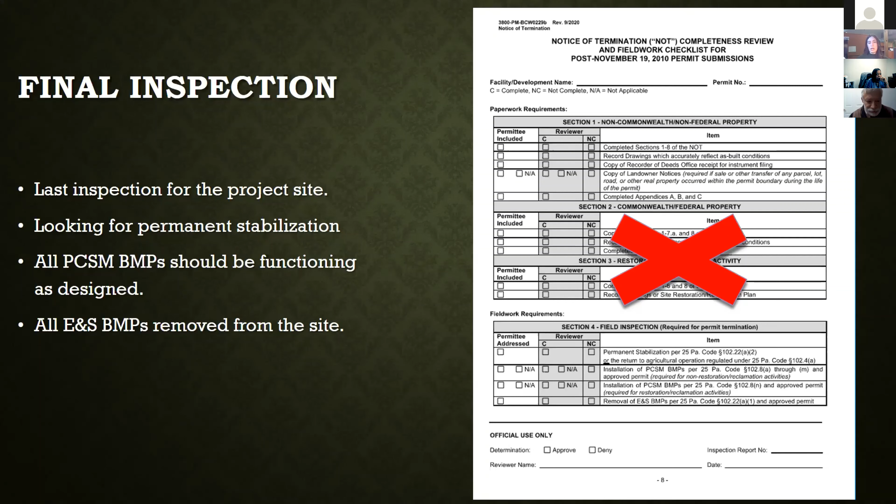So once the NPDES permit has been terminated and it is now the responsibility of the HOA, there are a few things to keep in mind to make sure the BMPs keep working as designed.

Each project comes with a post-construction stormwater management plan. Within those plans should be a detailed description of each BMP on site and the maintenance schedule for each. For example, there may be a vegetated swale that requires mowing twice a year, or a basin that will require inspection after heavy rainfall to ensure it is draining properly.

One other thing the operations and maintenance plan should detail is what the definition of failure is for each BMP. This will point out what signs to look for if the BMP were to stop functioning. In this case, the plan should also provide who to contact if this does occur.

An HOA or property maintenance group may want to keep a log of each BMP and document the routine inspections and maintenance procedures to be sure that it is done in a recommended time frame.

One thing to highlight is that once the permit is terminated, it is the HOA's responsibility to maintain all BMPs. If a member of the community would like to install any structures on their property, such as a shed or a pool, it's always best to consult the post-construction plan to be sure that the proposed structures are not within the limits of an existing PCSM BMP.

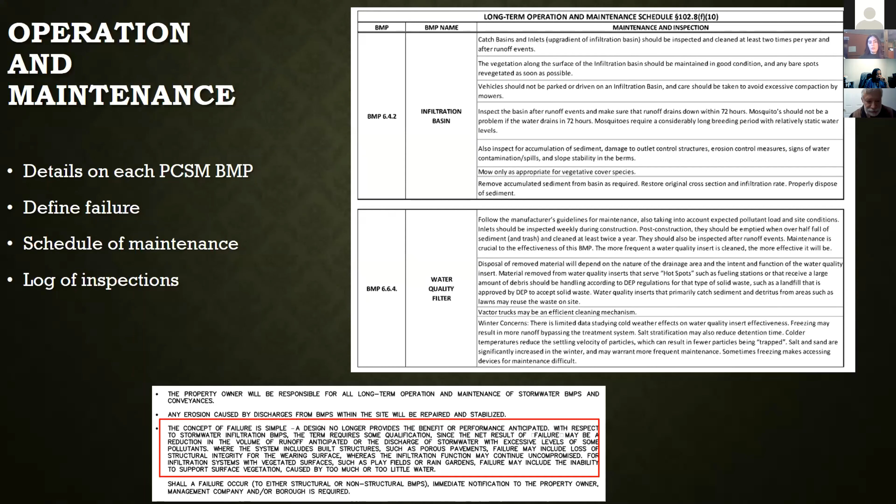Since the PCSM plan has been recorded, the BMPs are now deed restricted and cannot be removed unless otherwise mitigated on site. Okay, so once the project has been terminated from the NPDES permit and no longer held at the Conservation District...

It is usually sent to the local Department of Environmental Protection, or your local municipality should have a copy as well. In this case, for the Southeast Region, PA, the DEP is located in Norristown, Montgomery County. If it does occur that an HOA would need a set of plans after the permit is terminated, it would be best to contact DEP or reach out to your municipality.

So if the HOA has a stormwater complaint after the permit has been terminated, it should be directed to the local borough or township. In many cases, these types of complaints would be handled by the township's MS4 permit.

For example, here I showed my neighborhood in Phoenixville. They have on their website information about the MS4 permit, and they provide a link to contact the borough with questions. Conservation districts are only delegated to address stormwater complaints while the site is still covered under the NPDES permit.

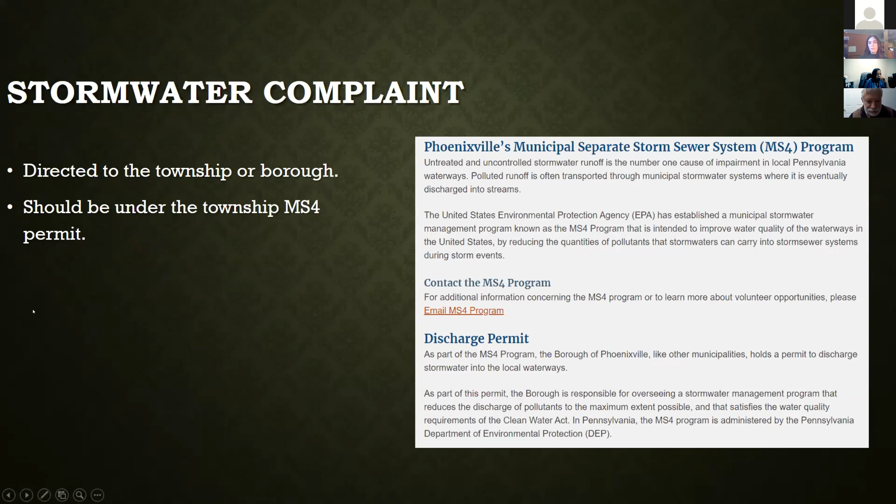Looking at the questions in the chat, it's looking like people are looking for clarification as to how this applies. So a general overview for our HOA members of what does NOT mean? What is the NPDES permit? It sounds as if we could take a step back and start at the beginning. That would be great. How does this apply to the HOAs? What is the general context?

Thank you. So the NOT is the notice of termination, which will be terminating the NPDES permit. And the NPDES permit is what is required in order to construct the property or whatever project is being built. So that would include any of the stormwater and E&S controls on site.

Yeah, I believe Ed just kind of cleared that up in the comments as well.

Thank you. And how does this apply to systems built prior to 2010? For instance, if the HOA was built in 1985?

I'm not too sure about that. I would have to get back to that question. Okay, thank you. Do any of our other speakers want to take a stab at that question? Jeff, are you unmuted?

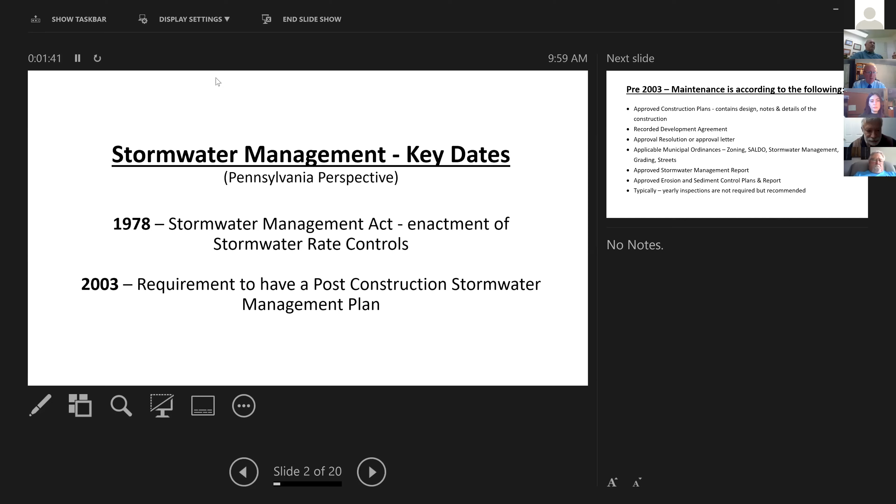The second key date was 2003, when we started having post-construction plans. I believe 2010 is when the NPDES requirement went from 5 acres to 1 acre—that's where 2010 comes in. As Carl noted, and as I'll touch on and Zach will touch on, the post-construction stormwater management plan and report have a large amount of information that help the association—both the board, the residents, and the manager—going forward on what they need to maintain and timing. We can address some of that with the questions.

Pre-2003, we talked about existing developments. They have swales, detention basins, storm sewers, all those improvements. What's really important to know is get a copy of the approved construction plans. Typically the municipality has these, some are scanned, some are paper and need to be scanned, but getting the construction plans, all the design, the notes and the details, that helps.

Because that's basically a blueprint of what was to be built. There's a recorded development agreement that will often have conditions in it for maintenance, and operations and maintenance agreements. There's an approval resolution or approval letter that may also have terms and conditions. Developments are also subject to the applicable municipal ordinances, such as zoning, subdivision land development, stormwater management, grading, streets. All of these things have elements of maintenance built in.

There is typically an approved stormwater management report. Sometimes there's notes and details in that report that don't reflect on the plans. There's an approved erosion sediment control plan and a report, or E&S as we talk about it. Typically yearly inspections are not required for most of these, but they're often recommended. Once a year at least gives you a good look. Is everything functioning? Is there clogging? Is there water? Typically you might see 6 to 8 inches of water in some of the BMPs, but if you're getting 2 or 3 feet, then it may not be functioning. There's ways to address improving it or changing vegetation.

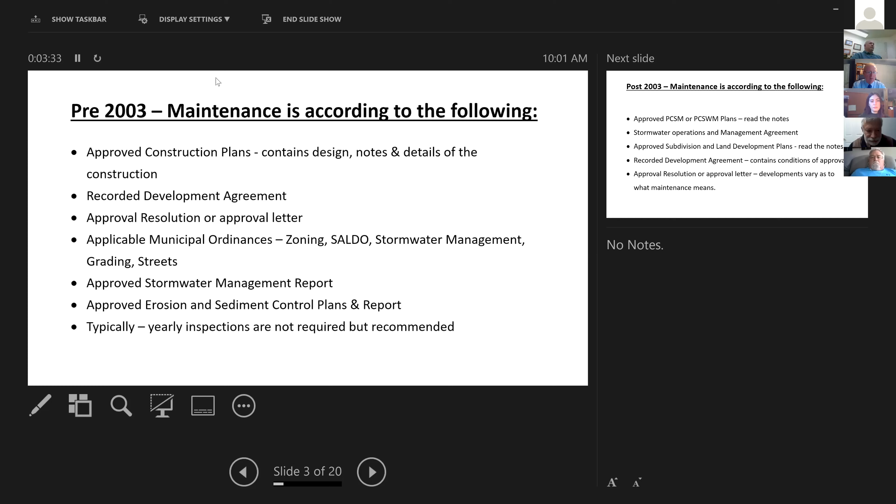Okay, post 2003, when we started having PCSM, post-construction stormwater management plans, or PCSWM, they're known both ways. Once these plans were part of the plan set, the requirements were that they get recorded at the courthouse in that particular county, which is a good thing.

Sometimes the scale and the clarity of those is difficult to read. You should, when you're transitioning, get a copy of all those items as part of the transition package. I would say this and I'll say it again: read the notes. Engineers love notes. We love notes to cover all kinds of things. And oftentimes you'll find a wealth of information buried within the notes.

There's a stormwater O&M agreement, operations and maintenance, and this will spell out all of the items that the HOA will have to do going forward after the NOT, notice of termination, is closed. There are approved plans, subdivision land development or construction improvement. Again, read the notes because they often clarify maintenance responsibilities - if the township takes the streets, is the HOA still responsible for the storm sewers underneath?

The development agreement, as we mentioned before, contains conditions of approval and the approval resolution or letter. Each of these developments are different. Different things are HOA responsibility, and sometimes things are a shared responsibility or township responsibility. So you really have to have your individual documents and your declaration.

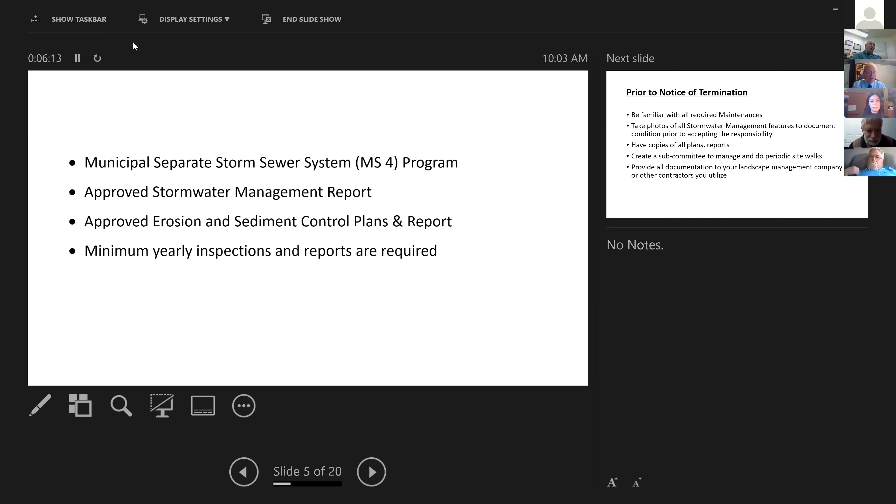And that report should contain a lot of information, including inspections. That's something that the township can do now. They can require the inspections now for everything, again, post-2003. Approved stormwater management report, erosion and sediment control, and again, yearly inspections and reports are required under MS4 and PCSM plans.

Prior to the notice of termination, as the development is getting built and close to being done, a lot of the developers like to keep control of all the BMPs, like to keep control of the open space, because all of these things are negatively impacted by the development. Development and dirt moving and construction generates a lot of dust, generates dirt, soil erosion. All these things serve to degrade the BMPs. BMPs don't like lots of silt, don't like all of the other roadway chemicals that get to them.

So what you want to do is be familiar with all the required maintenances that are called for under your post-construction plan. When you're getting close, take photos of everything, document the condition prior to the development, the HOA taking over responsibility.

I think this is an important point. All of these things are built, but they don't always function right away. Some of these vegetations take anywhere from a year to 3 years to really grow in. So when they plant a certain mix in a wet basin, it doesn't always show up right away. It takes time.

Have copies of all your plans and reports. This is information you should get through transition. The township should have a complete copy of everything, which you can obtain through a right to know request. And sometimes we go back right to the developer's engineer and get copies of stuff from them.

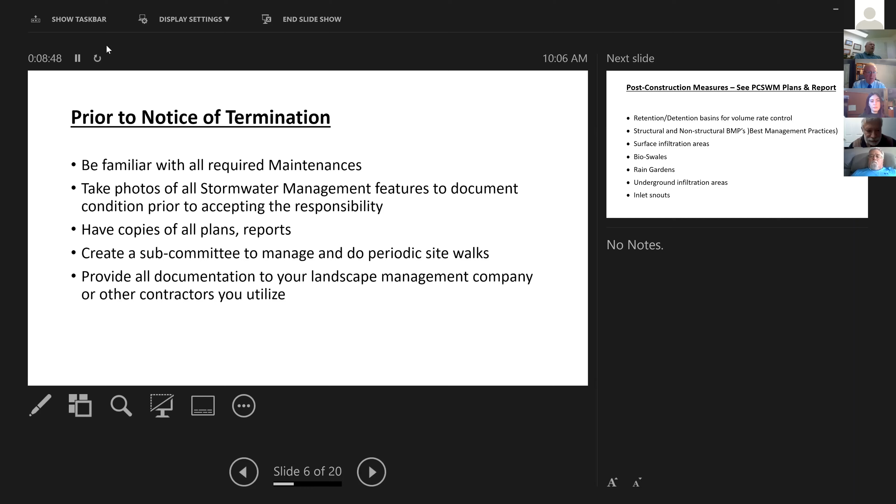Post-construction measures - look at the post-construction stormwater management plans and report. The retention-detention basins are essentially for volume rate control and some stormwater control. In many cases, they use the detention basin for sediment control, and what happens is the sediment will often slow down the rate of water being able to infiltrate in these areas.

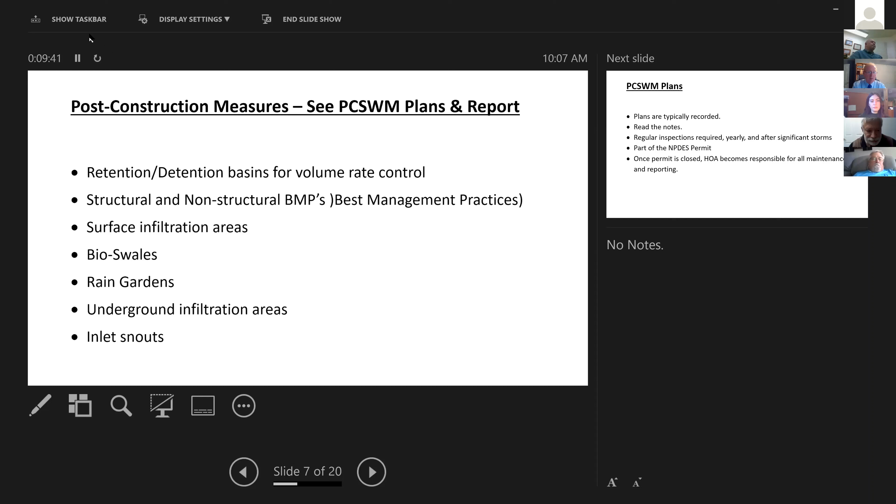There are surface infiltration areas, bioswales, rain gardens, underground infiltration areas, and inlet snouts. I have some pictures of these things so you can see what they are. Post-construction plans are typically recorded. Some municipalities didn't get into recording them right away, but I believe they are now.

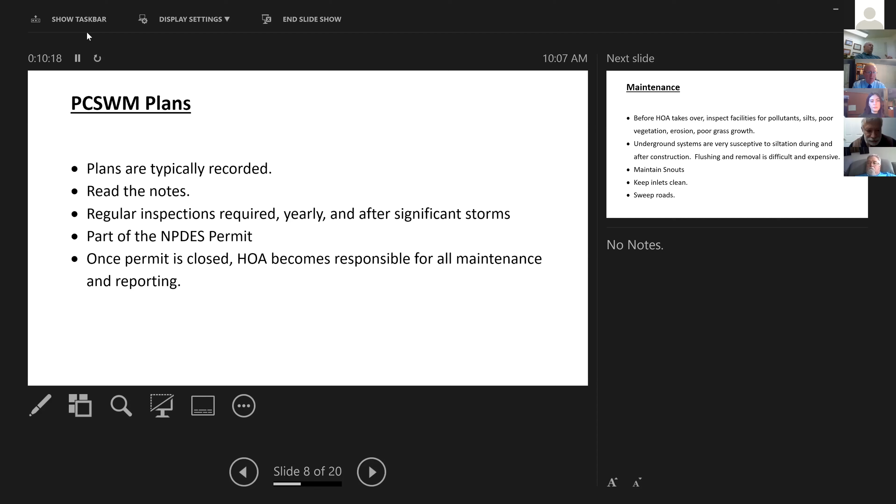Read the notes - they contain tons of information, all the maintenance guidelines, maintenance requirements, timing reports. This is all part of the NPDES permit, and we talked a little about the notice of termination. Once the permit's closed and the O&M agreement signed, the HOA takes on this responsibility, and I believe Carl touched on the fact that this can be assigned or turned over to other entities.

Maintenance - before you take it over, do a careful inspection. Look at silt, pollutants, vegetation, erosion, poor grass growth. Underground systems are very susceptible to siltation during and after construction. Flushing and removal is difficult and expensive - that truck that comes in to flush and take sediment out of underground basins will run you between $2,500 and $5,000 a day.

There are inlet snouts, which are fiberglass devices designed to keep plastic bottles, glass bottles, and other larger pollutants out of the stormwater system. Those will need to be periodically opened up and maintained. Keep your inlets clean - one of the biggest things I see when inspecting is inlets clogged on the surface, which means they're not functioning, especially with leaves, and material in the bottom sometimes clogging the water from getting into the pipe.

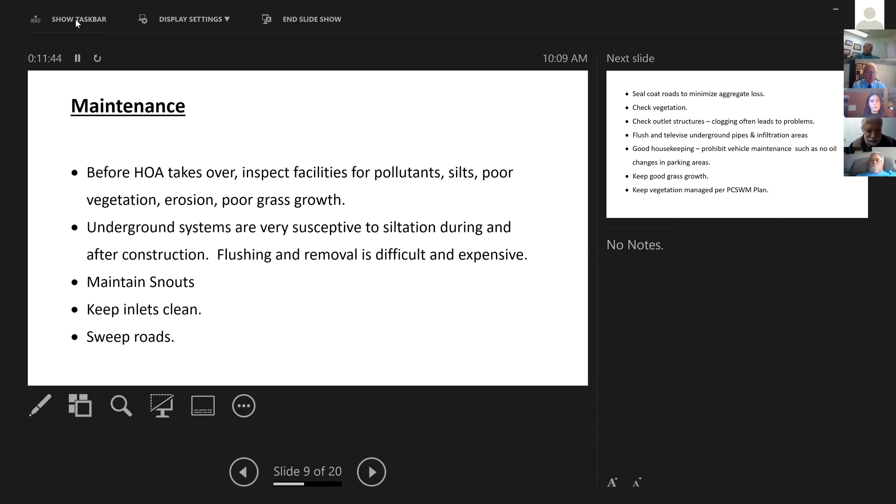Road sweeping, as Carl mentioned, is a BMP that can keep the amount of silt down. As asphalt roads weather from outside weather and sun, they dry out. As it dries out, that surface layer of stone gets looser and eventually gets washed in. Seal coat your roads periodically - it minimizes aggregate loss, which keeps your systems more clean.

Check your vegetation, good grass growth in the swales. Check your outlet structures - clogging is often one of the biggest issues. You may need to flush and televise all the underground pipes and infiltration areas. Again, when they're buried after they're done, it's very difficult to get that silt out.

Good housekeeping - most associations already have these rules, prohibiting vehicle maintenance, oil changes, things like that which really do damage to all these systems. Keep good grass growth - this is very important, as all that silt that occurs from erosion will get into your storm system and into your BMPs.

As the PCSM plan requires, keep your vegetation. I also want to point out that most PCSM plans incorporate management of all the street trees, buffers, and areas that are to be preserved. So vegetation management is very important.

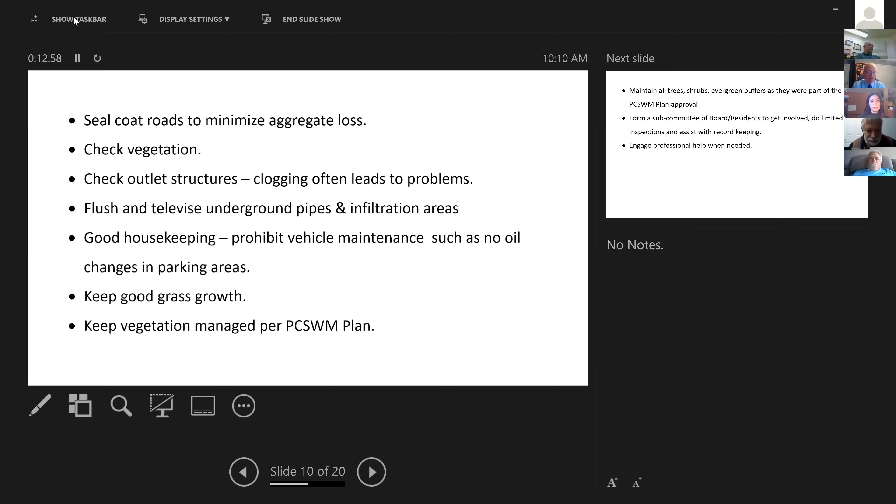Zach will touch on that a little bit.

Maintain all trees, shrubs, evergreens, as we mentioned. There are many of these inspections the board or residents can do themselves with a little bit of training, then engage professional help when needed. Typically, once a year you want somebody with proper training to come in. As noted in the questions, there are courses on stormwater management inspections and training, but a lot of this is simply having time and experience in the field, being involved with building developments like this.

Types of underground systems, just to touch on them so you can keep them in the back of your mind: pipes such as high density polyethylene, concrete, metal. Metal is very difficult, subject to premature failure and rusting, depending on if it has water in it all the time. If silt accumulates, it stays wet.

Plastic chambers or arch-type pipes, I'll show you one - what we call in the business a box of rocks, or ballast-filled pit. This is often on a lot to handle roof drains. Roof water is considered clean and can be infiltrated. Tanks and vaults are for heavier duty, and then there's pervious pavements.

I know some communities are built with pervious pavement. It needs to be vacuumed periodically, typically once or twice a year, and oftentimes the municipality will ask for a receipt from a company that does that type of work.

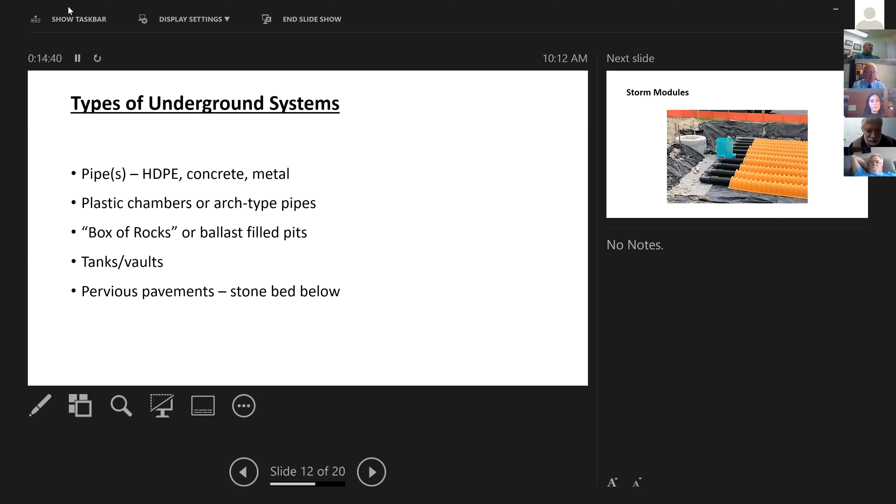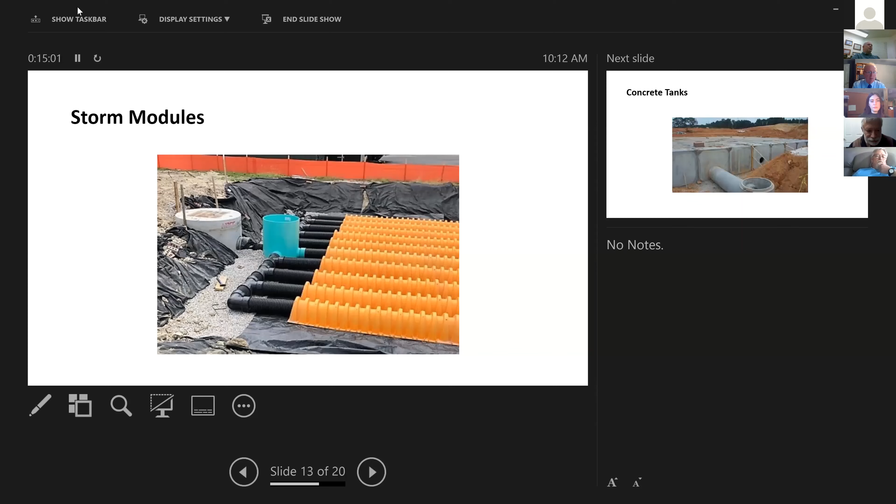Storm modules are like arch-type chambers to store stormwater underground. If you look carefully, there are very limited ways to inspect this, and if those pipes are in the range of 18 to 24 inches, getting in is a confined space issue. Sometimes you have to televise these, and you can't always get a good picture of all the silt that accumulates.

Concrete tanks - we did one of these a couple years ago in one of the municipalities I worked in, done for a bus garage where they needed the ability to park buses on top, quite a load. They're a little easier to access if the openings are big enough, but same thing, very difficult to flush.

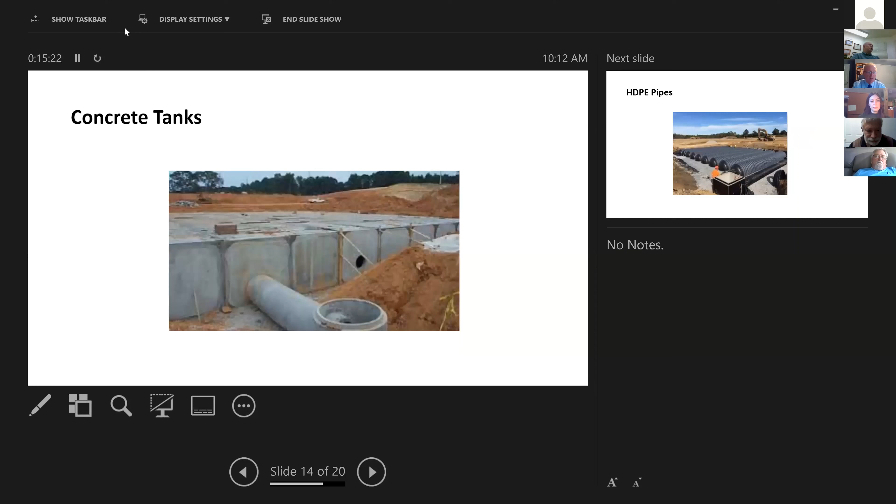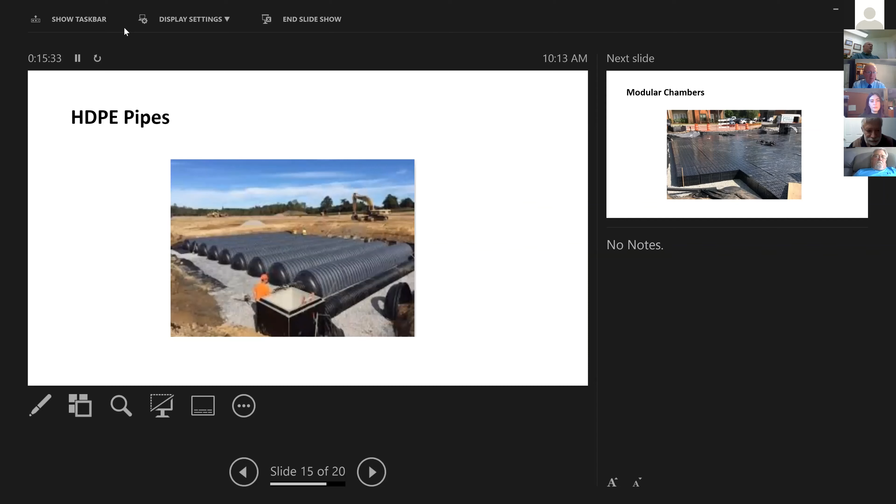HDPE pipes, sometimes there's a series of pipes like this with manifolds. If the pipes are big enough, somebody can get in, but again you have confined space and OSHA issues to be careful of. Modular chambers, egg crates, there's a whole lot of names.

These are often about 96, 97% volume, which makes them very efficient. However, structurally you have to be careful depending on how much load is on top of them. Again, getting the silt out once it's in there is very problematic.

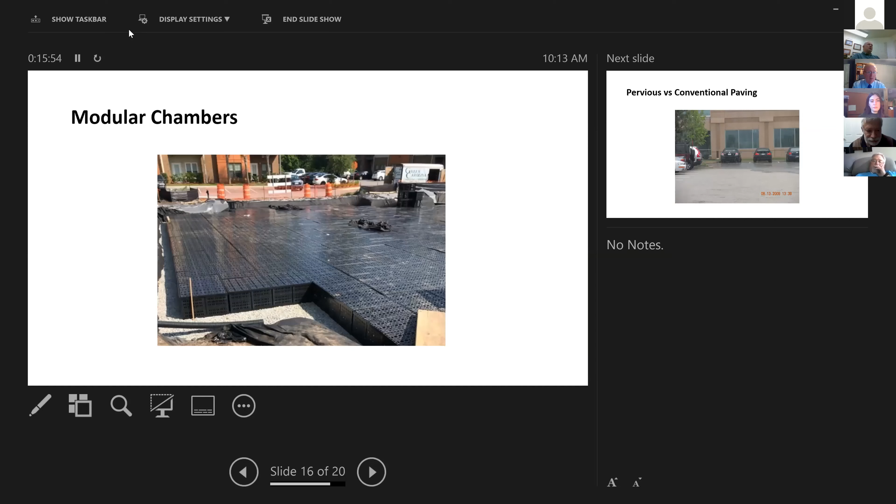Pervious paving - if you look at the top of the parking area close to those three black cars, you'll notice it's very shiny. That is conventional paving, where you can see, in this fairly heavy storm when I took the picture, a lot of rain coming off. In the foreground is pervious pavement installed on two feet of stone. That serves two purposes: it helps filter the water as it gets into the groundwater, and it also stores a volume of water.

Pervious pavement will last maybe 10 to 15, with good maintenance 20 years, but it doesn't have fines in it - it lets the water through. It's very subject to clogging, so you have to vacuum it. It's something you definitely have to keep track of. I'm aware of at least one development recently where all the driveways are pervious paving.

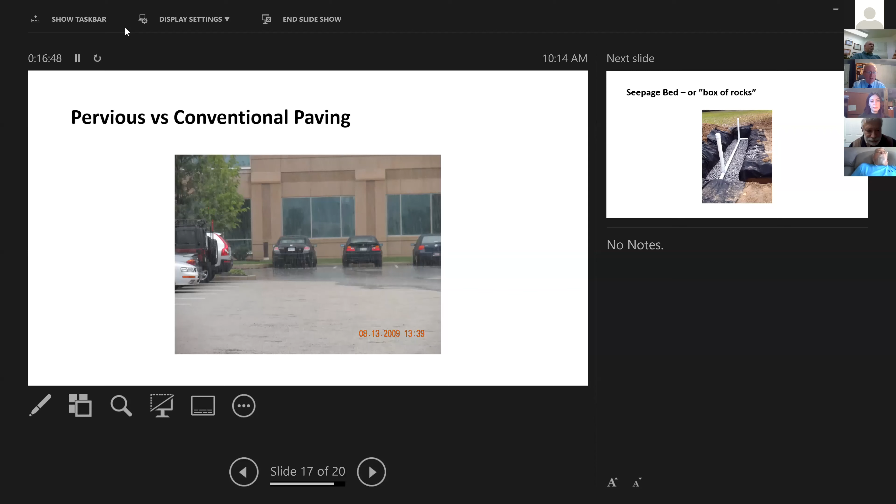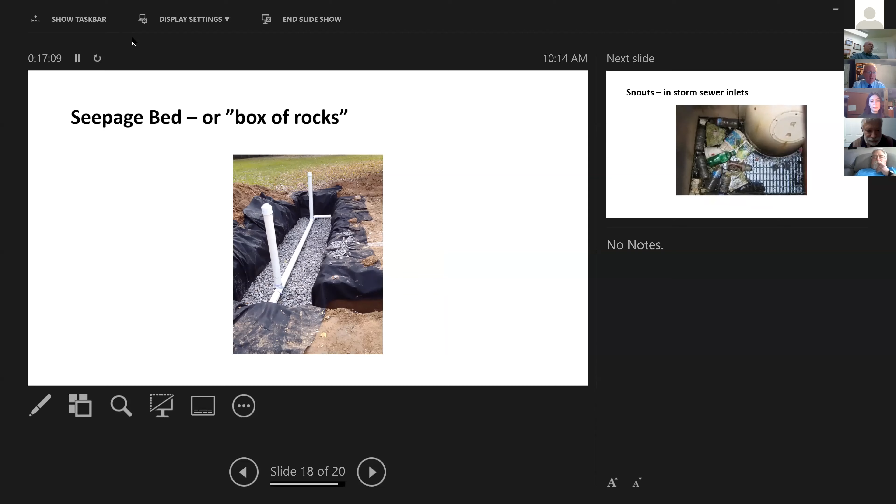Seepage bed, box of rocks - this is more often just a residential thing, filled with ballast, covered with a fabric to keep excess silt out. This helps you infiltrate water. Long term, I think these are good things. We're infiltrating, and I believe the current requirement is you have to infiltrate the first two inches of any storm.

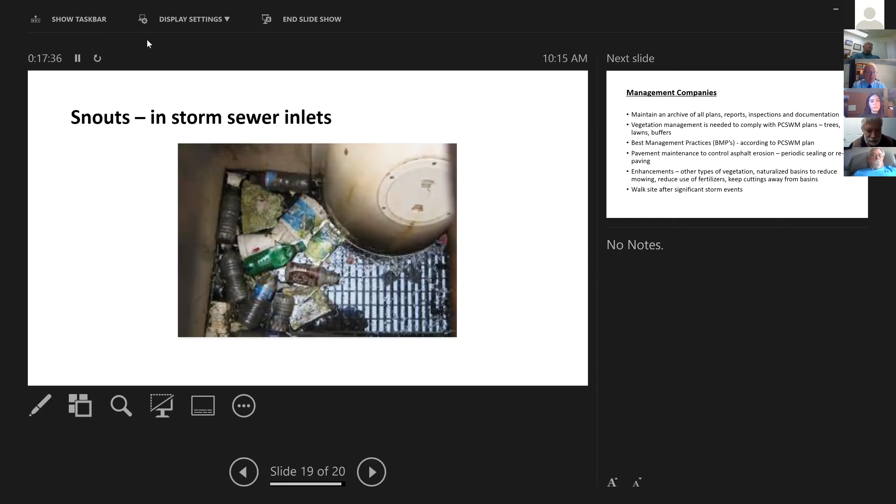Snouts are basically designed to keep all the trash out of the storm system. They need to be maintained periodically - you have to pull the inlet grate off, which you can see in the reflection, and the snout itself will need to be opened. The whole thing needs to be cleaned out, and this is something you're probably going to have to do yearly. So it's good to be aware of which inlets have snouts.

Management companies should keep an archive of everything - plans, reports, inspections, documentation. It's important that gets passed on, that the board or board members have copies and some continuity. Vegetation management is important. Best management practices, BMPs, again, follow the post-construction plan. Pavement maintenance to control asphalt issues.

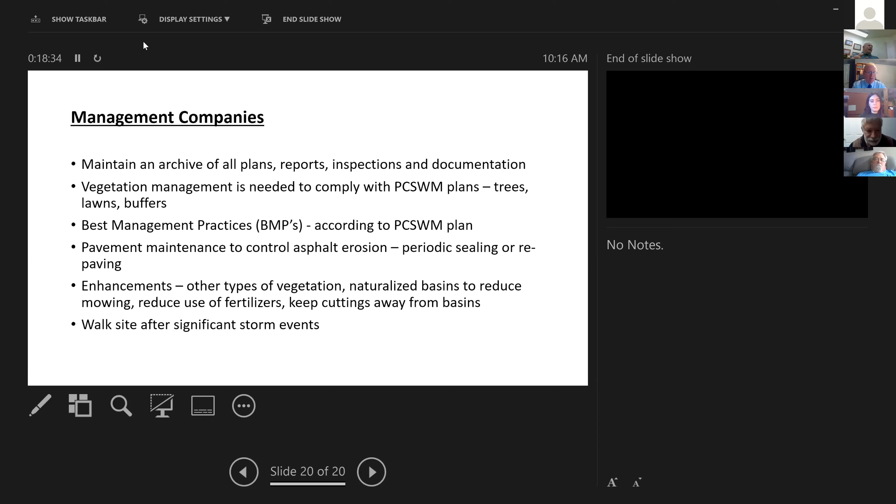Resealing, repaving, enhancements - Zach will cover this in detail. There's other types of vegetation. There are naturalized basins that can cut down on mowing. You really want to watch your use of fertilizers because they take away from the basin's ability to be healthy, and keep all the cuttings away from the basins. The fertilizers and the cuttings lead to what we call a green monster, where the surface of the basin has a sheen of green algae. Walk the site after storm events - Carl touched on that. And that's all I have.

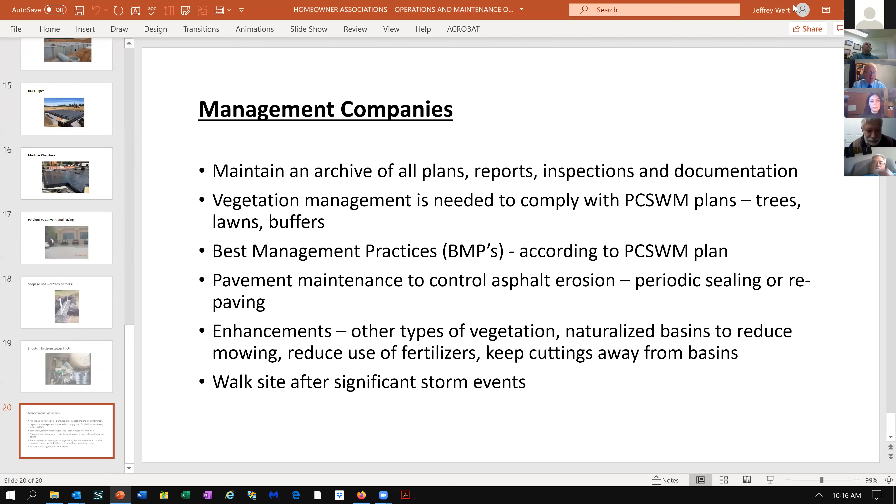Will there be any grant money available from the state to help HOAs with these expenses?

There are grants available, and I've done a couple basin naturalizations where a grant was available, either through a conservation agency - there's probably half a dozen operating in Southeast PA. I can't specifically say who has the money or where to find it, but I know there are grants available if you have somebody that can do research, and I have somebody, if anybody wants to email me, that can help with that research. But yes, there are some grants. Again, if you naturalize a basin, you're helping the water quality long term. And to go back and touch on something mentioned in the questions, for developments older than 2003 that don't have PCSWM plans, you may not have a lot of these BMPs built in, but it's not a bad thing to start now, because the townships, under their MS4 - Municipal Separate Storm Sewer System plan - are required to improve their water quality long term.

I'll add that the conservation districts might serve as a resource for HOAs looking to do some of that naturalization work. So you could reach out to your local county conservation district - there's one in each county. I know specifically here in Montgomery County, we have a no-till drill seeder that can be used to convert mowed turf lawn to meadow. It can also be used to naturalize basins. We've done a few demonstrations with that tool to drill seed in a warm season grass, cool season grass mix, pollinator plots, that sort of thing, to convert traditional turf to a more naturalized grass seed mix. So that's a tool that might be appropriate, or conservation districts can just provide technical assistance. We have watershed specialists on staff that can come out and assist, as well as engineers, to help with naturalizing properties, so don't hesitate to reach out.

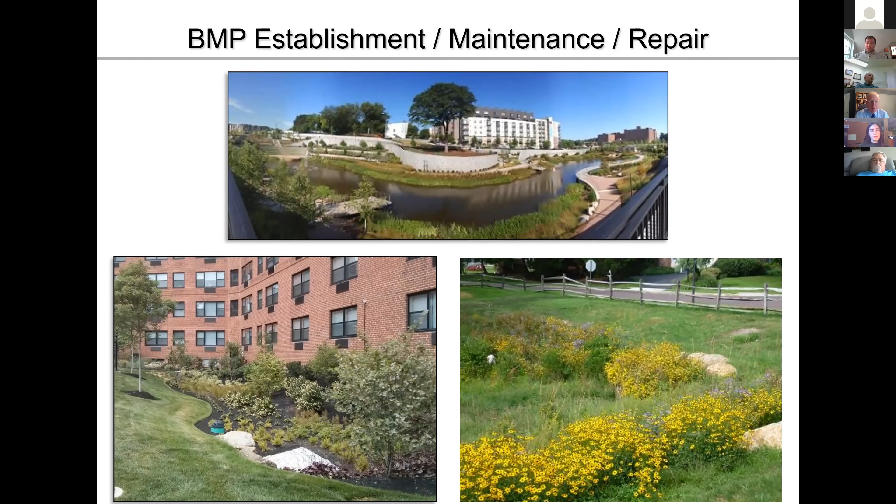So when we're talking about above ground basins, and especially establishment of wetland basins, bioretention areas, rain gardens, etc., we really want to promote cutback of plant material to promote diversity in the basins. A lot of times a wetland seed mix or plant material has a dominant component, and if left unchecked, it'll crowd out some of the smaller stuff that gets planted. So we recommend cutting back that plant material to promote diversity.

Additionally, we like to go in and selectively weed for invasive species and volunteer plant species, to make sure the overall health of these facilities is maturing properly.

This is more for the conversion from E&S to post-construction for these facilities, but installing goose netting and matting. In these pictures, you can see a basin we converted from an E&S erosion sedimentation facility to a finished wetland bottom basin. The goose netting is basically fishing line strung between stakes with ribbon on it to keep Canada geese out, and matting down the seed mix, because if you get a big flushing rain, the matting will help keep the seed mixes where they're supposed to be, so you don't have your meadow mix and rain garden mix washing down and making the downstream properties look worse.

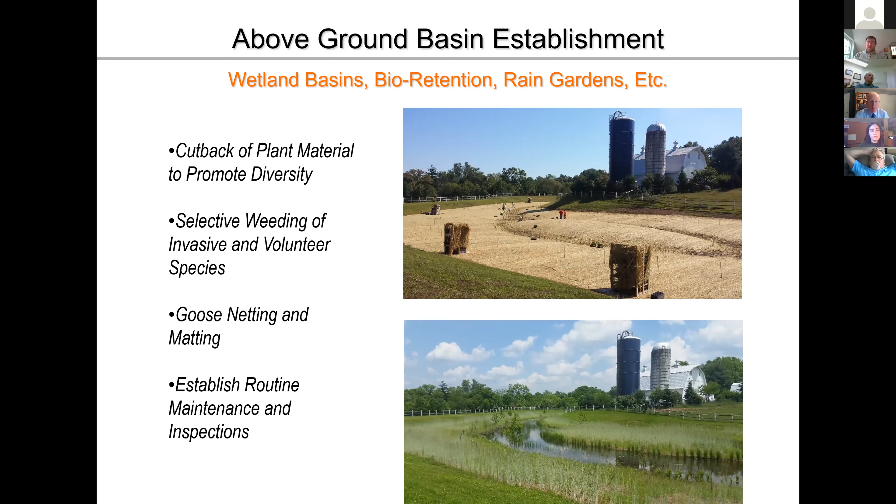As far as inspections, we like to inspect with our professional staff - either myself as a civil engineer, or someone on our staff like a landscape architect, engineer in training, or engineering technician. But we also like to stress that our communities are on site all the time. They look out their window and see the basin, so if they see something, it's really good to let their landscaper or board know, to have someone come out and take a look at those issues.

During inspections, we like to look for scour and sedimentation. If there's scour at any point upstream of your basins, the sedimentation all washes down into the basin bottom, and we see a lot of older basins that can have up to feet of sediment on top of where their approved basin bottom is. That makes the basins dangerous for downstream property owners, as well as not really functioning properly for the community.

Additionally, we look for animal damage. We've seen instances where groundhogs are burrowing into structural fill berms - the berm being the part of the basin that retains the water. If left unchecked, they can wreak havoc and allow water to find a path of least resistance out of the basin, which can result in catastrophic failure. We also evaluate for invasive species and monocultures, and we're able to head those off before they become a major issue.

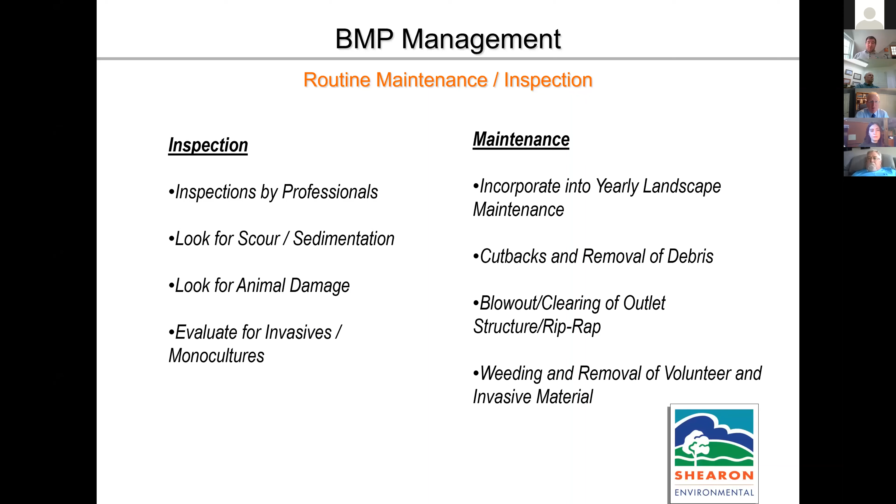Additionally, weeding and removal of volunteer plant material. If an inspector or landscape architect goes out and identifies areas where volunteer plant material could be a problem, or if invasive material is getting in, like Phragmites in certain cases, they determine how to get rid of that material.

As far as cutbacks, we found that 2 cutbacks per year prior to the basins being fully established are recommended. We usually recommend one at the end of summer, like late July or August, where the taller plant material hasn't quite gone to seed yet, so we can get rid of that and allow everything to grow up together through the fall growing season, and then a dormant cutback of the plant material. We find that if you cut it back in the spring, there's too much stress on the plant going into the drier summer months, and it's bad for the basins.

As far as monitoring for invasives and monocultures, we typically recommend for our clients that 3 times during the growing season, someone come out and evaluate the basins. For our clients, we have trained landscape professionals that are doing that constantly.

We really want to evaluate for scour and structural problems. We recommend after 2-inch and greater storms, going out and taking a look at the basins, making sure there aren't any structural problems starting to develop, like new channels being formed through the basin that are scouring, depositing sediment closer to the outlet structure, and blocking things up.

Additionally, we want to monitor the outlet structure and inflow areas. We found that training landscape professionals to perform this while on site is key, since they're the people most intimately involved with your site besides property owners and management companies. So really training the landscape professionals to perform this work while they're on site is a huge bonus.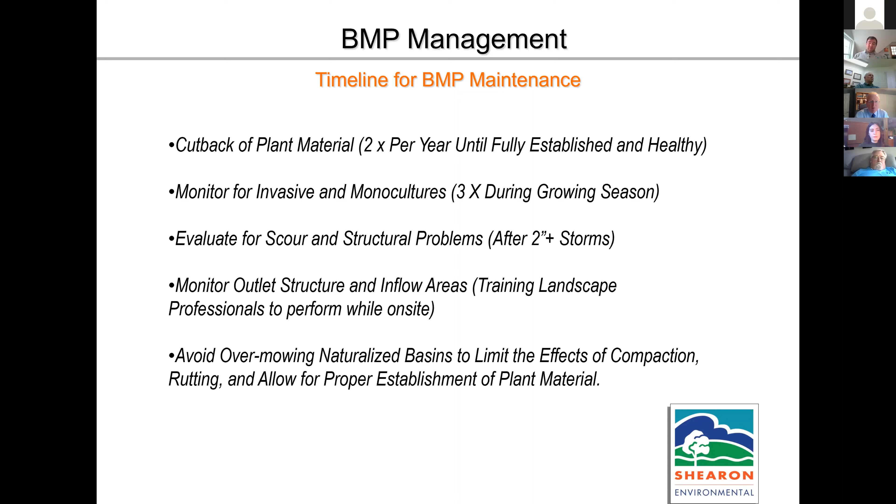Additionally, removing debris after cutbacks. When you cut back the basin, we really need to remove that plant debris to help stop the clogging of the outlet structure and stop the buildup of dead plant material, which will raise your basin bottoms.

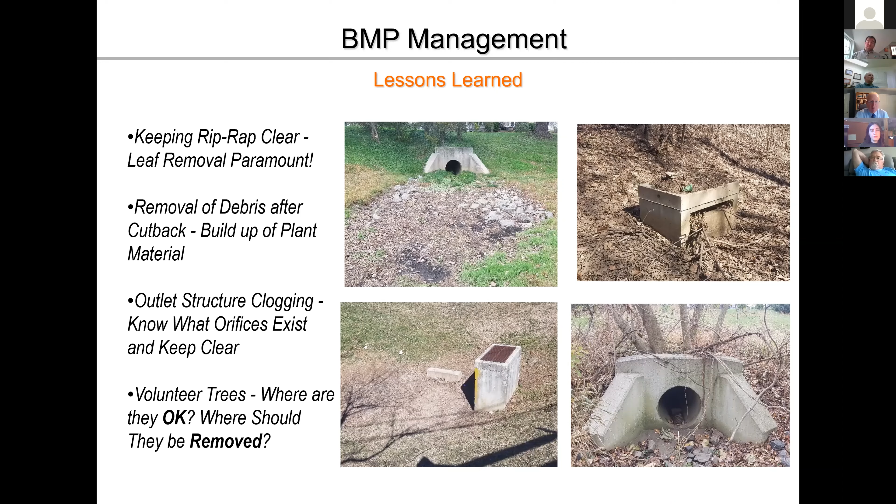So next, I want to touch on the effects of aging infrastructure.

So where does stormwater go in your community? It flows through swales into inlets. The inlets flow into storm sewers, and storm sewers run into stormwater best management practices, such as basins, rain gardens, and underground facilities. Ultimately, that's the last place before it enters the natural world in creeks, streams, ponds, and lakes. So effectively managing all of those systems on your site is paramount.

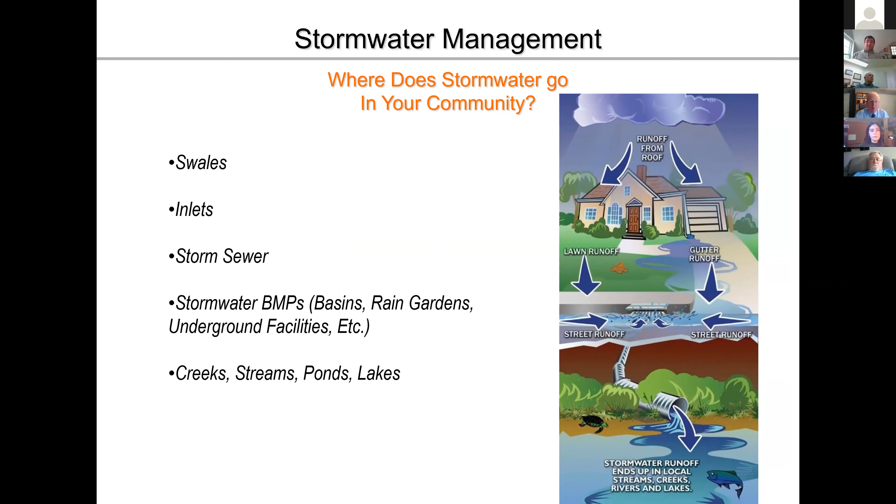You really want to make sure that if you're an older community, you start to develop a plan. We work with a lot of our communities to develop a master plan for arboriculture, drainage, or landscape, as to how to most effectively manage this, because these numbers can start to add up as communities age. Additionally, Gordon from Chester County forwarded me a picture where a pipe had failed in a basin berm, leading to a catastrophic failure. There were also volunteer trees growing in that fill berm, which likely contributed to that.

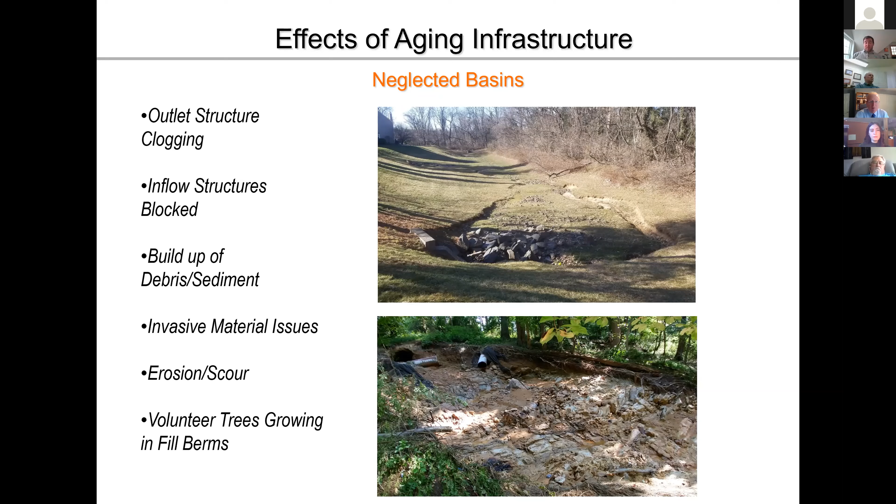Next, we want to talk about storm sewer. A lot of communities built in the 90s had corrugated metal pipes, and we're starting to see throughout our region that those pipes are beginning to fail. So we really want to touch on inspecting those to determine their condition and develop priorities for replacement.

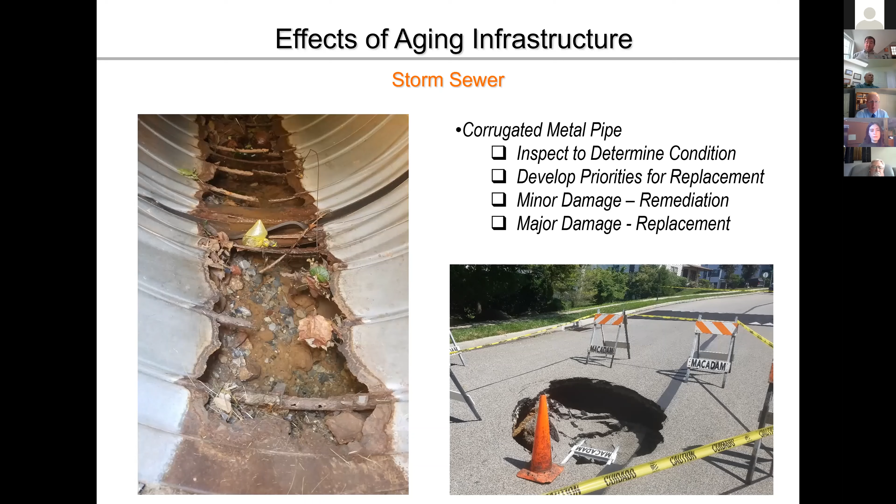Concrete pipe, we really want to inspect joints and mortared areas. Concrete pipe is a lot easier to fix. Mortar can cure a lot of ills. We want to inspect if you start to see sinkholes along a pipe run where it's concrete pipe, sometimes where the reinforcing steel is, there's void areas around that, and they can open up over time. So patching that, fixing sinkholes before they become major safety issues is a good idea.

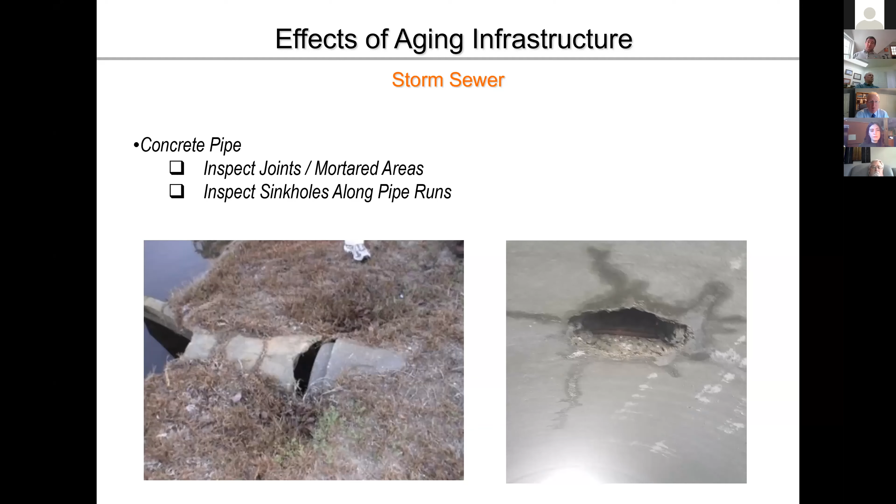Lastly, plastic pipe. A lot of newer communities are using HDPE, which is high density polyethylene pipe, or solid pipe like SDR 35, which is sewer and drain pipe. We recommend using double wall or solid pipe if you're going to retrofit existing storm sewers, or have to amend or remediate some drainage areas. But the major issues we see on sites are people using single wall or flexible pipe.

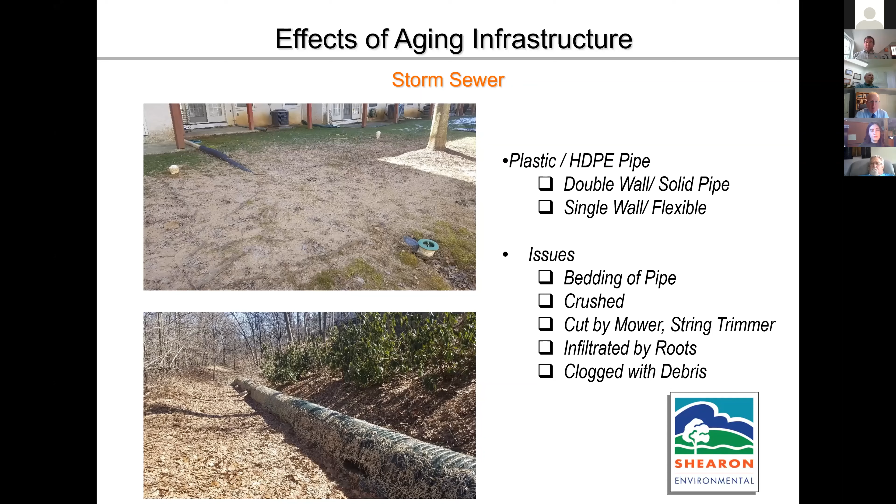If you look at the picture at the top, that kind of has every major issue. It's a pipe that doesn't have cleanouts, so there's no way to clear it if it becomes clogged with debris. It can get hit by mowers or crushed because it's not buried deeply or bedded in stone. Additionally, it can get cut by string trimmers because it's in a grassed area where it's above ground. And really, there was no forethought as to where the water was going on the downstream side, so it's led to erosion.

Keeping your inlets clear is important. The inlets are where water gets captured and goes underground. Once stuff goes underground, it's a lot harder to get debris out of. So making sure that the inlet grates and underground portions of the inlets are kept relatively clear throughout the year. It's as easy as having a landscaper blow off the inlets, making sure he's not blowing stuff into the inlets, and extricating things that get stuck in there.

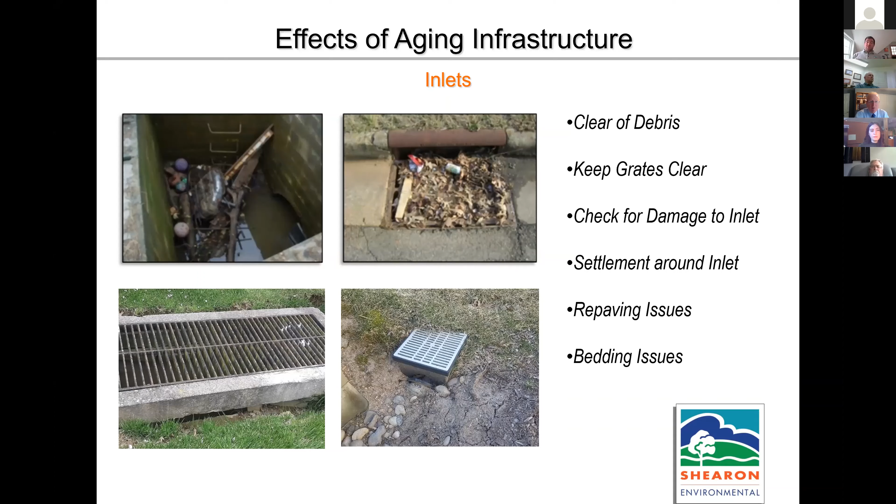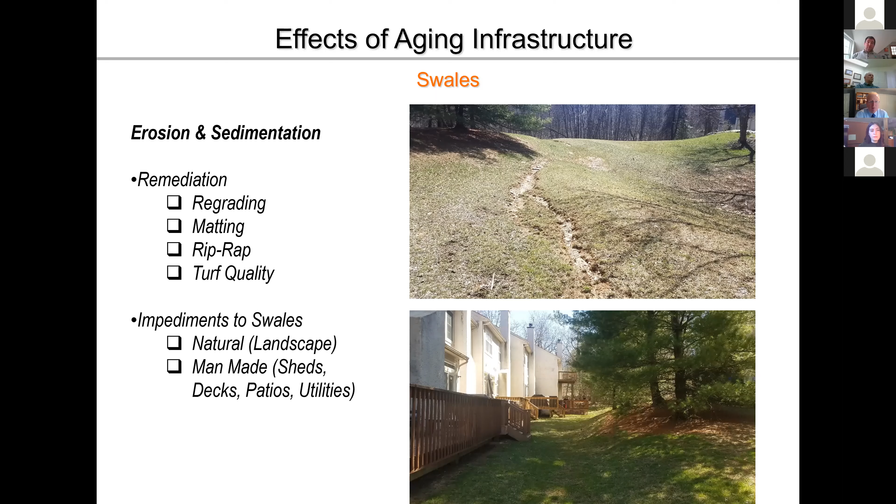And lastly, putting hedgerows or landscaping into swales—some people think it's a good idea to have a tree in an area, but if it's in a swale, it'll eventually lead to ponding and flooding issues.

So that's most of my presentation. I just want to stress that having a plan for how to deal with stormwater management is a really good idea for older communities—having something going forward to work with your landscaper and with professionals to help get your communities to the place where they need to be.